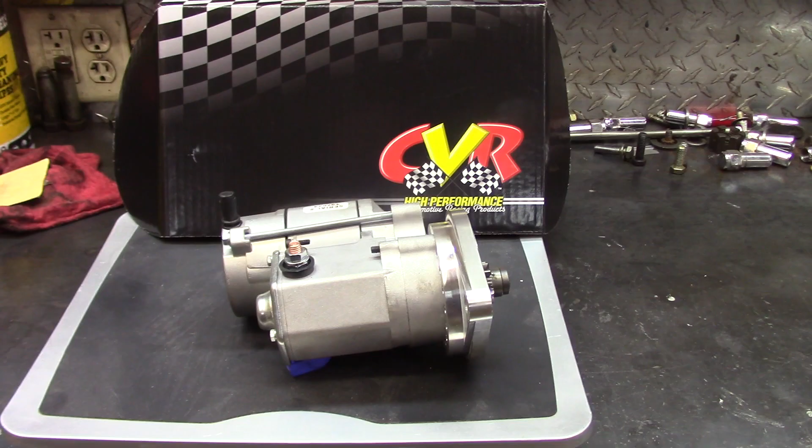Working on the Javelin today, we're doing a CVR starter install. The reason for it is I was putting this starter back in and the threads pulled out of the frame. There's really nothing wrong with the starter, and the first thought was just to put a Helicoil in here.

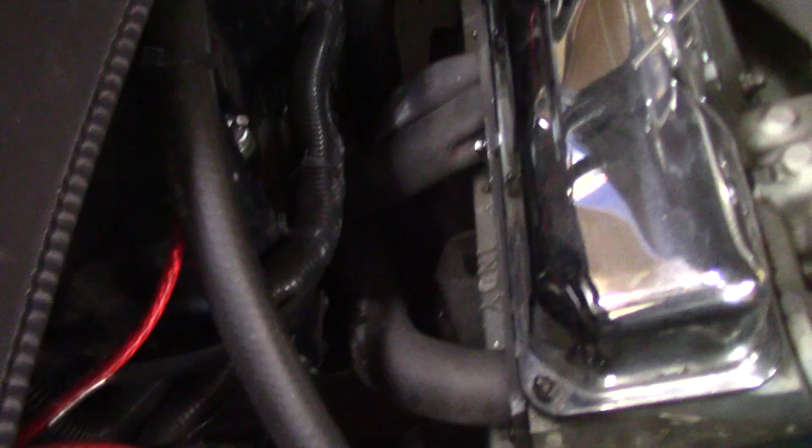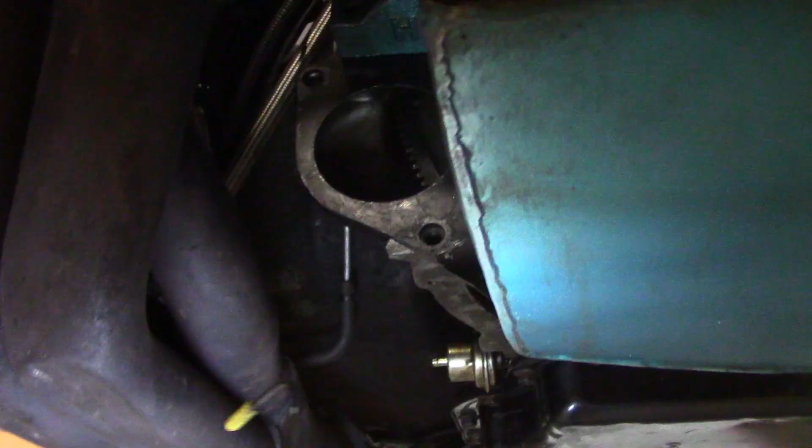But the problem with that is we got a thick tube header in here and that starter was difficult to get out. The header actually had to come off and the engine had to be jacked up to get it out. This here is the opening that we had to shoehorn the starter through to get it out.

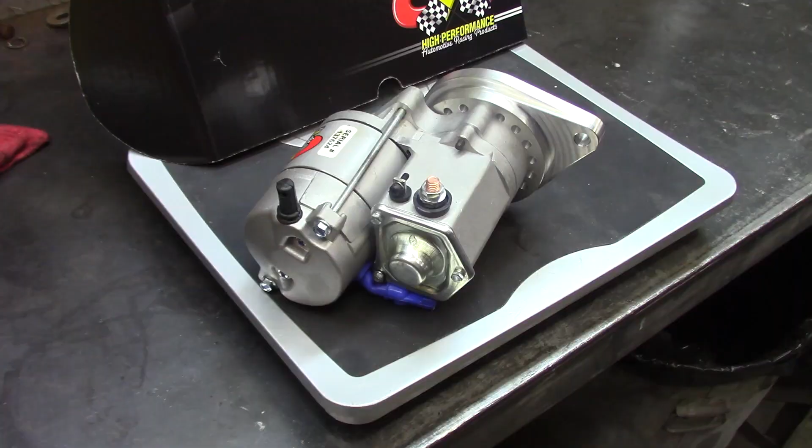And you can see the starter actually bolts to the transmission, not to the engine. This metal plate we're talking about clearancing for the flex plate bolts actually helps locate the starter. The reason I picked this starter is for the ease of working on it. It should be able to fit up in between there without having to move the header around at all. We'll have a look here.

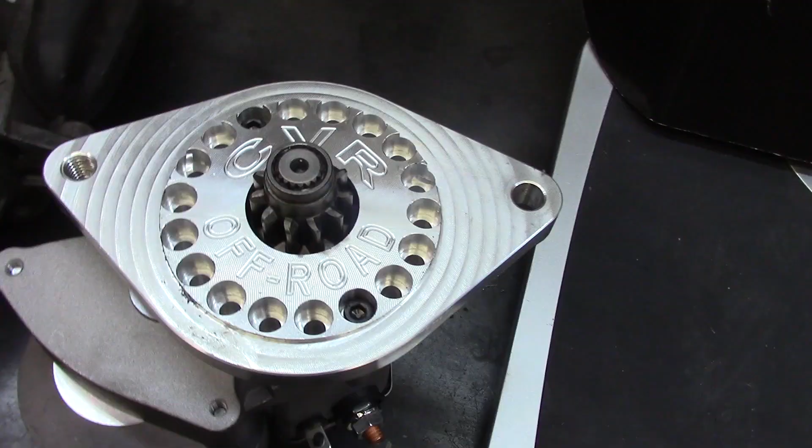It fits up into the general opening like a champ. This starter can also be clocked in 18 different directions. Another nice feature, you can get away from the oil pan and the header. As it sits, I'm going to have to rotate it a little bit to make it work with my car.

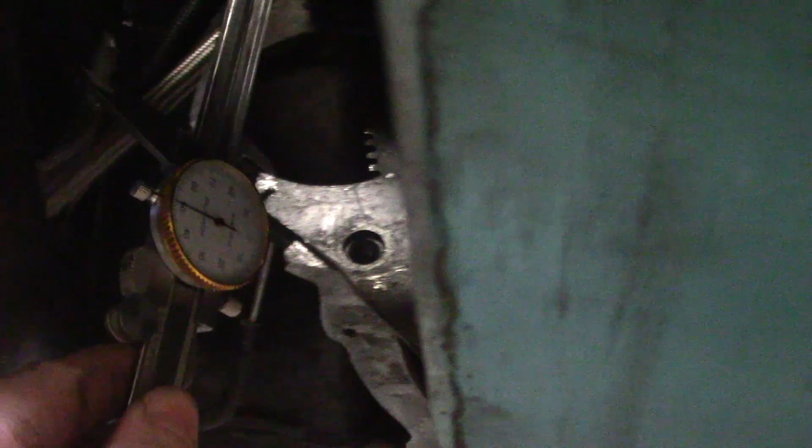And before I go any further, I'm going to comment on this hole size. I'm getting about 3 1/4 with this caliper. This original type starter fits that perfectly, but this guy's a little bit on the short side. Looks like it's short by about 35 thousandths.

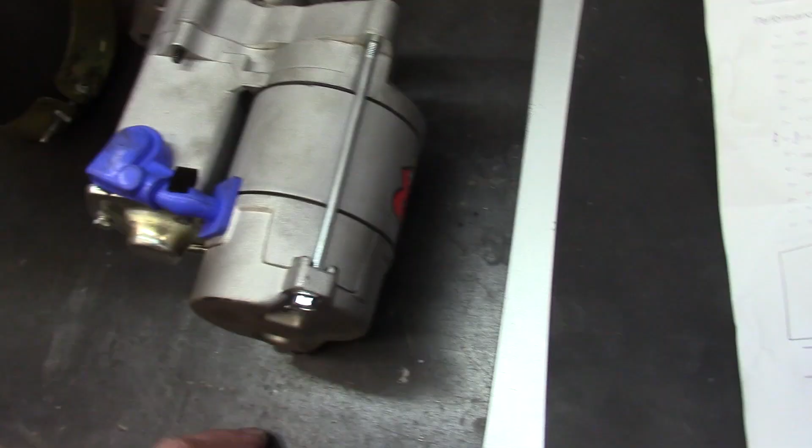The starter was tested, and then they included the test sheet in the box. There's some torque specs and things down there. That might explain why this thing looks like it actually turned a little bit. This bolt is tweaked, along with the one on the other side. I'm just going to put it in and see what happens.

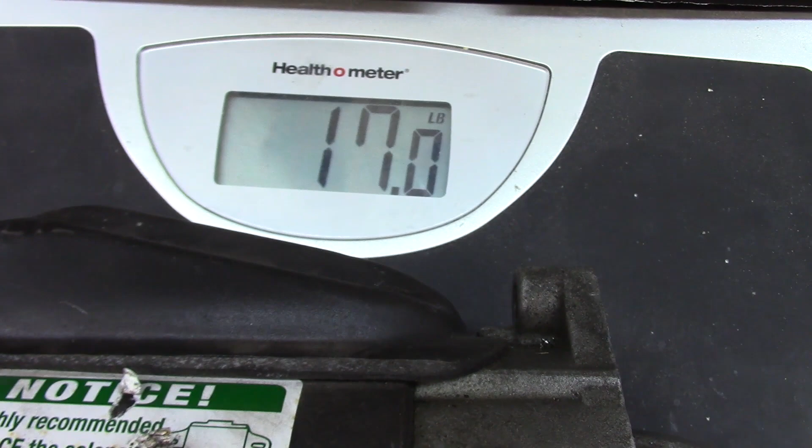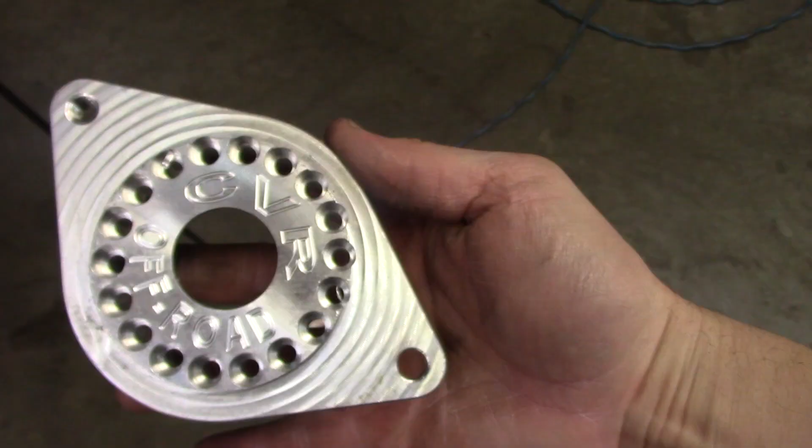We're going to do a weight comparison here of these two starters. Looks like 17 pounds and 8.2, less than half of the weight of the original starter. I'm going to start the show by removing these two Allen screws and getting our clock correctly. So there's what that's looking like. I'm going to bolt this piece onto the car to set up my fitment.

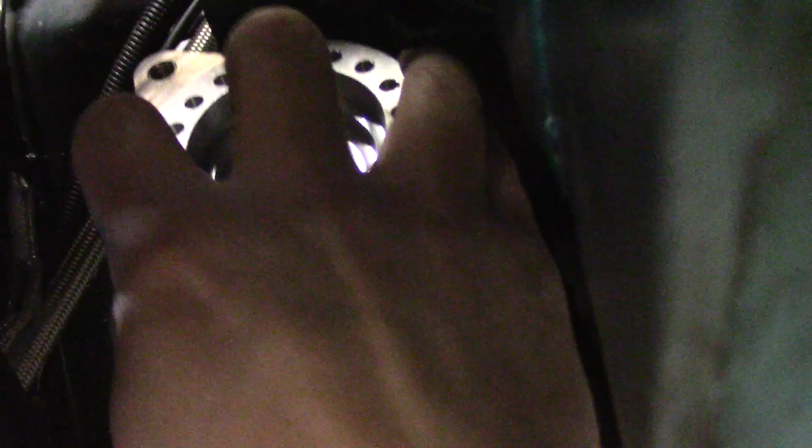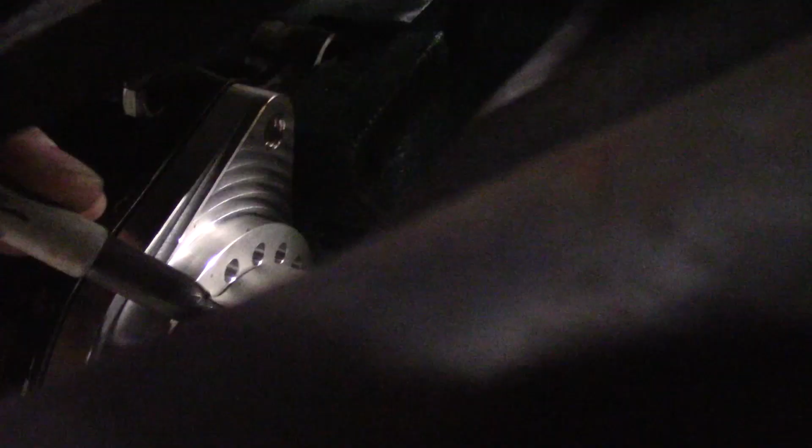You can see all that play I was talking about. That's a bit of a disappointment. So my piece is bolted on there, and I can rotate this now on it to see about where I want it. And really I want it as far away from the header as possible. I'm thinking somewhere right in this neighborhood.

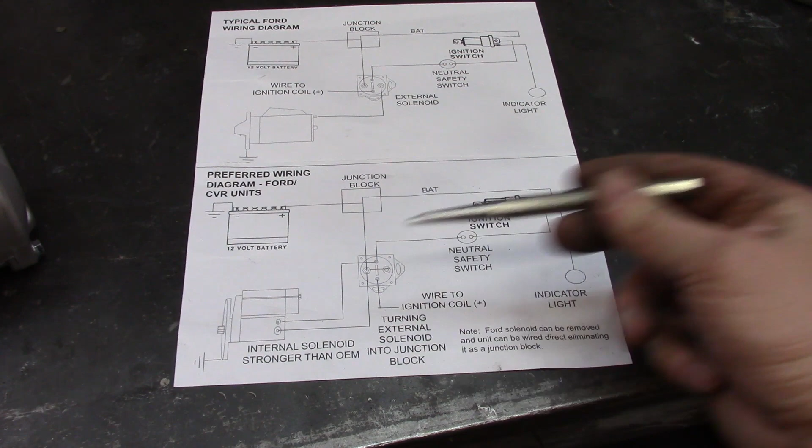The starter comes with some instructions. The instructions are calling for hooking up a wire for a solenoid at the starter. The original AMC starter just had a positive cable going to it. I think I'm just going to make a jumper wire here, and maybe in the future I could fuse it and use that as a no start switch for a security measure. I'm going to do a little bench testing to confirm.

I've finally taken the time to cut a couple pieces of aluminum angle to make some soft jaw caps for my vise. I don't know, what do you guys think? Is it time for a new set of jumper cables? Going across both the terminals. Not spinning. Just having difficulty getting a good connection across here with these old crusty cables.

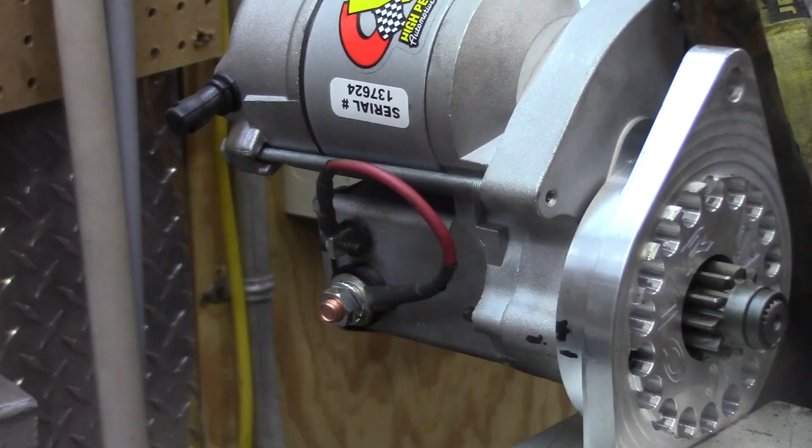So I'm just going to go ahead and make the jumper wire. Soldering it up, of course. I got tired of buying little strips of heat shrink, and I actually got some bulk stuff off eBay. Really liking these rolls. There it is installed. There is going to be a thermal blanket wrapped around this whole thing. We'll try our test again.

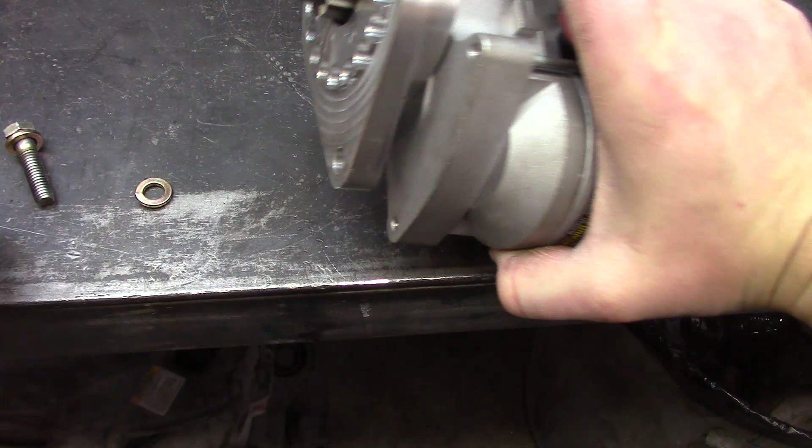I just realized that the way I want to clock this thing, I can't get my bolt in there. So the bolt's actually going to have to be in there first, and it's going to be a bit of a pain in the ass to install, but it will work.

It's installed now. It's kind of tough to see, but we've gained probably about 2 inches of clearance on that positive terminal to the header, which is really nice. There's my heat shield wrapped up on it. The stitching's actually falling apart on the thing. I might have to get another one. I'll finish putting the rest of the exhaust back on and the rest of the transmission back in, and then we'll start it and see how it sounds.

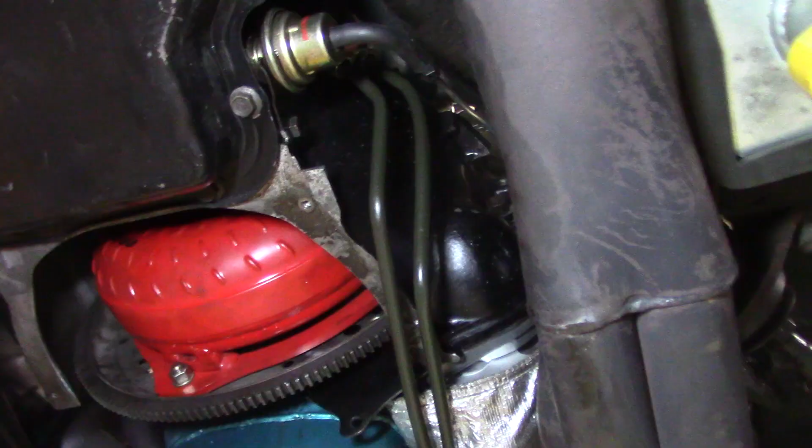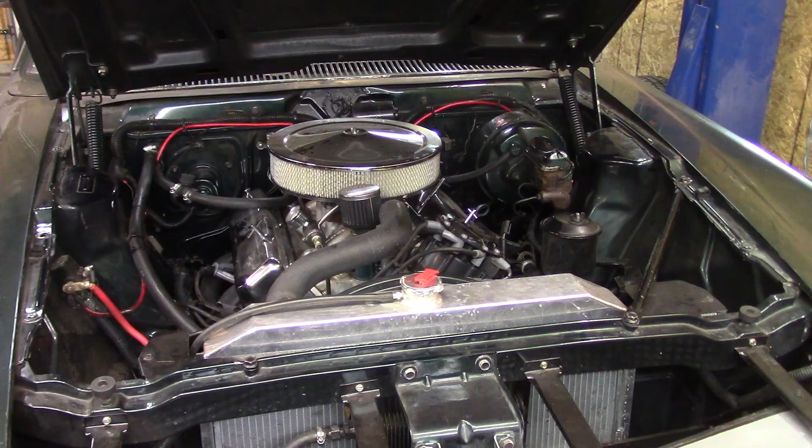I had these tranny lines custom bent for the original starter, and they fit perfectly. And now this new mini starter actually hangs down a little bit more. I had to make some adjustments to get the tranny lines to work. I've unplugged the distributor. I'll turn this thing over for the first time, and you guys can listen in with me to see how she sounds.

A little bit of a question there. Is it disengaging? Yeah, it is. We had a problem where it wasn't disengaging, and now it is with that little bit of movement. It kind of sounds like it's staying engaged for a second after the car is starting. Well, the jury's out on the starter at this point.

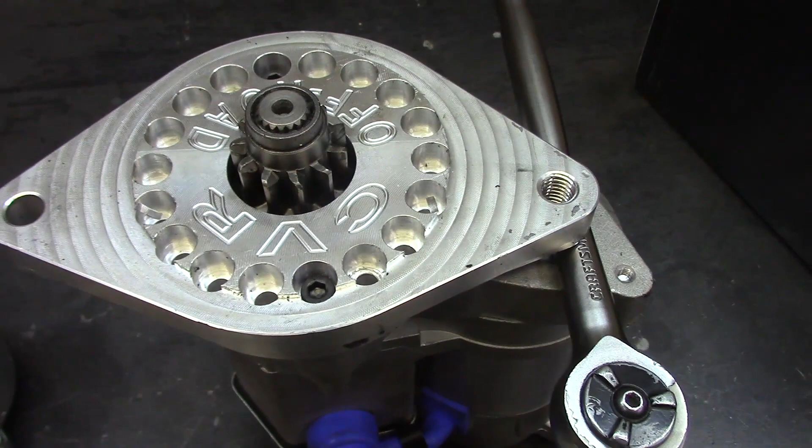I may order another one and see if it's machined any better than the first one. At least it's easy enough to get in and out of there. Well, I wasn't happy with the performance of this starter, and that movement kind of bothered me a little bit. It was getting hung up in there. There's kind of a funny noise as it rotated.

I started looking at the circle. You can see that screw hole has aluminum on the outside of it. Then you go to the other side and that's machined off. I took some crude measurements from here to here, and it's different. So I was thinking maybe I got a bad one. I got one of these starters in my Pontiac and it works great. So I got another one.

So I took a measurement here, and we go into this thing. You can see it's also quite a bit different. And it's got the same deal where it's like it's not on center. So I'm going to send these two back and maybe try a different manufacturer.

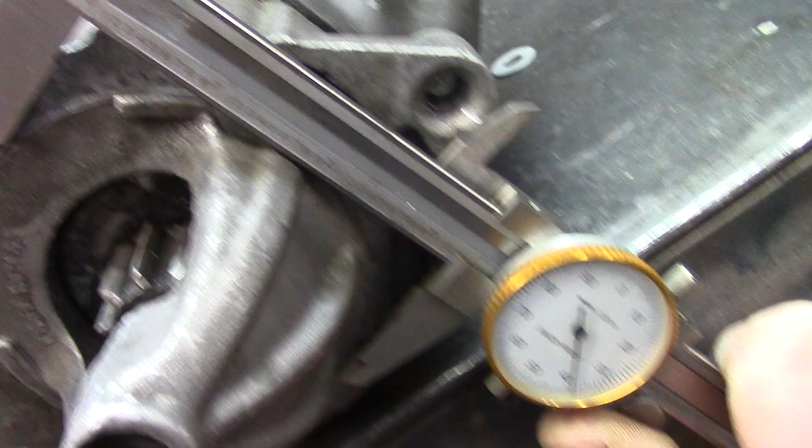Our new starter came in. We went with the Power Master. This one says it's made in the USA. I believe the last one said it was made in Canada. Measuring this again, we got about 3.240. And this one's pretty darn close. I didn't get this one originally because it looks like it takes up a little bit more space, and it was quite a bit more expensive. But if it performs, it'll be worth it.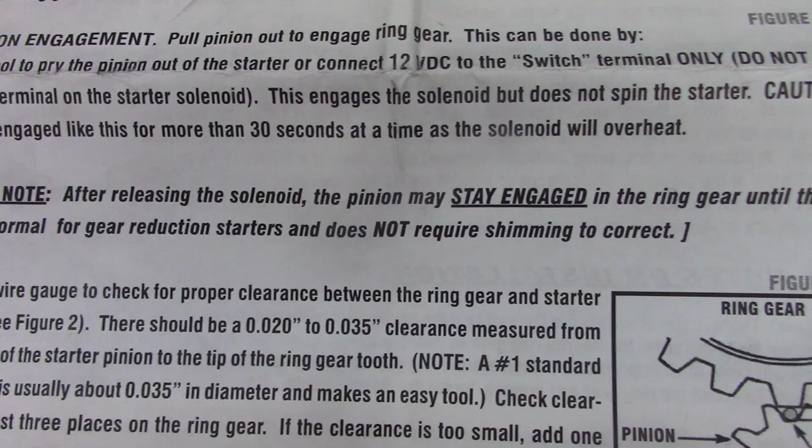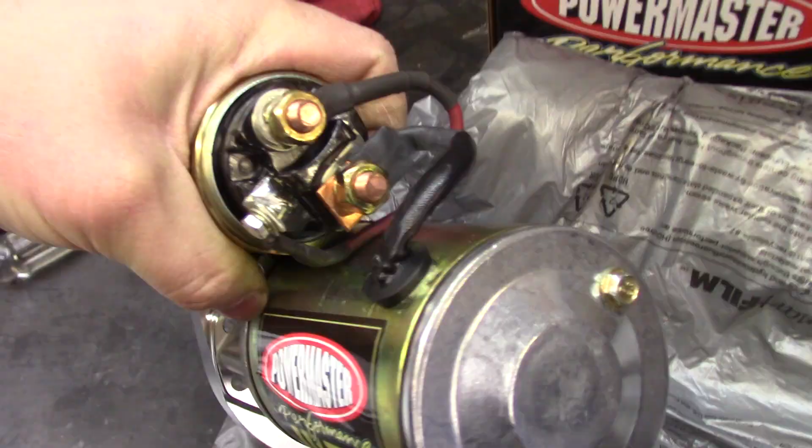This starter came with the dyno sheet also, and came with some instructions. It says that these gear reduction starters might actually stay engaged until the engine is started. So maybe that last starter was normal, I don't know. I didn't like the sound of it though after the car started up. I put that same jumper wire on this guy. It looks like this starter can be clocked 3, maybe 4 different positions.

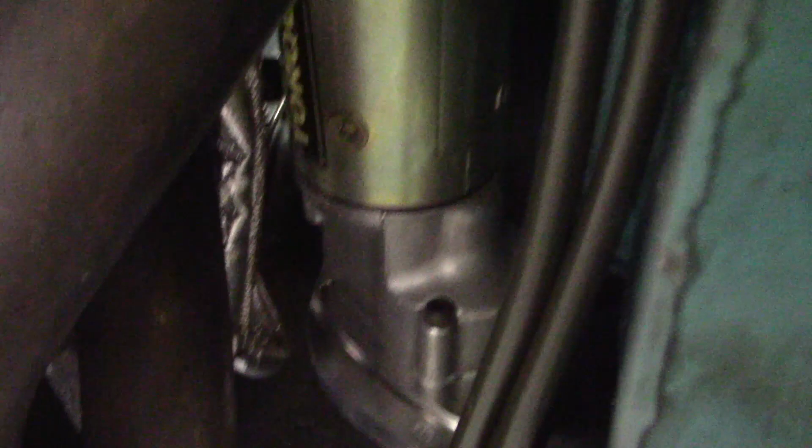This starter actually fit up there pretty easy, easier than the other one. It's not tight yet, but it fits in that hole a lot better too. There's a little bit of wiggle room, but not much. I don't have to do anything with my tranny lines either, leaving the starter in this position. I might have been able to tip it in just a hair more away from those headers, but I don't think 1/8 of an inch is going to matter much.

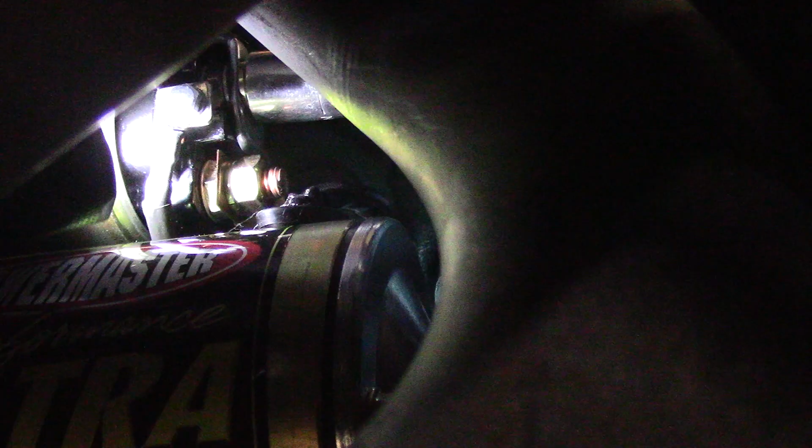I just put a little bend in my cable end so it fits up there nice and clears that header. The bottom of the positive lug is super close to the other terminal, so I think we're going to take it back off and clearance it. We're just going to trim a little bit of this on the bottom here off. Alright, we're going to try it with starter number 2 now. So we got the ignition unhooked.

Reminds me of a Chrysler. I'm a Chevy dude, so whenever my buddies with Mopars would start theirs, I thought, does that sound cheap? But there's a gear reduction. That's why it's making that noise. There's like a 4-to-1 gear reduction, and they all use them on race cars when you got high compression.

When he was cranking it over, it reminded me of my buddies that have Chargers and Super Bees, and they always sounded so cheap. Being a Chevy guy, GM guy, I never heard that kind of noise before, and now, after being around race cars, you notice that Chrysler had a good idea. It was a gear reduction starter, so it makes more of that noise because they work better on a high compression engine.

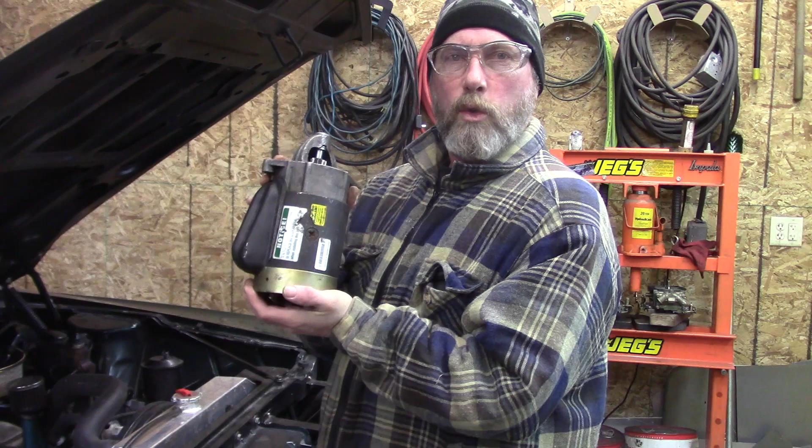When you're trying to use a regular starter with a direct drive, look at the size of this motor in order to turn over an engine. And you can get by on these little starters now with a gear reduction. You know how a bicycle works when you're in low gear going up a hill, or being in 10th gear. It's hard. All right, we've warmed it up. We'll do a couple starts. I'm satisfied with it. We're gonna run it.